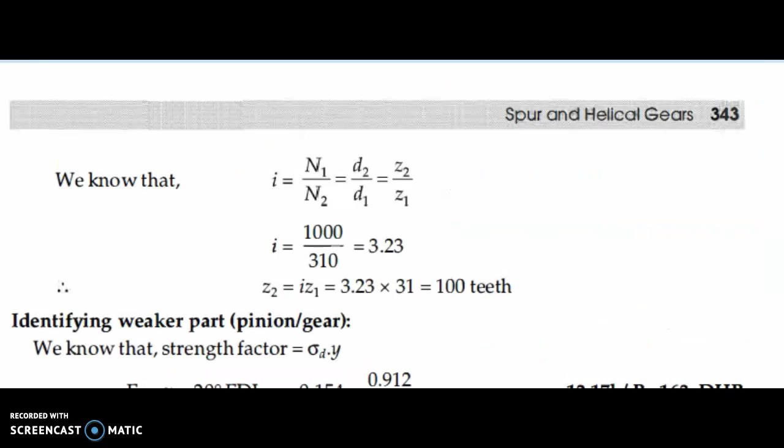There are a lot of changes from our previous questions. This is a particular case of design question, and from it we can identify the given data. The power P is equal to 20 kilowatt, and the service is 8 to 10 hours per day. We need a service factor for the calculations. For that value we need a particular category section for 8 to 10 hours per day, and it also shows medium shock, so there will be low shock, medium shock and heavy shock sections. Using the table we can find the service factor.

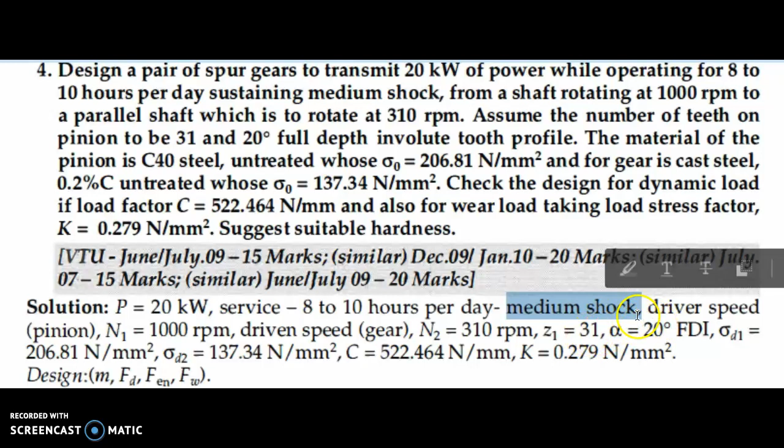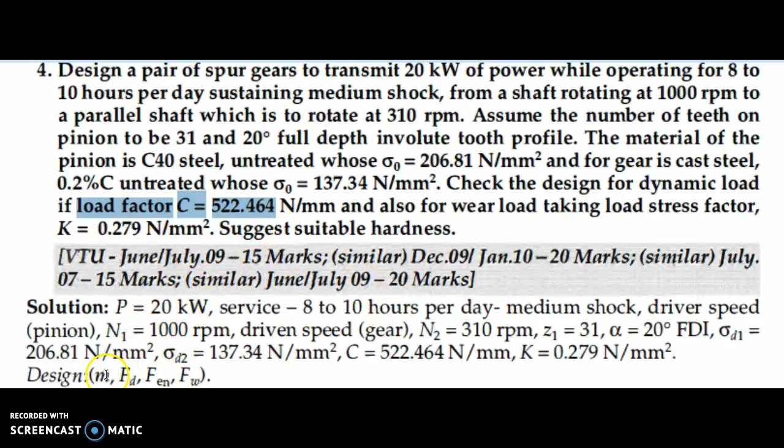They also give the speed of the driver as 1000 rpm, and speed of the gear as 310 rpm. Z1 stands for the number of teeth on pinion, that is 31, and alpha is given as 20-degree full depth involute system. Then sigma D1 is equal to 206.81 N/mm², and sigma D2 is equal to 137.34 N/mm². The value of C is given, that is another new thing - check the design for the load factor, C is equal to 522.464 N/mm, and the value of K, the load stress factor, is given as 0.279. You have to find the value of module, FD, FEN and FW.

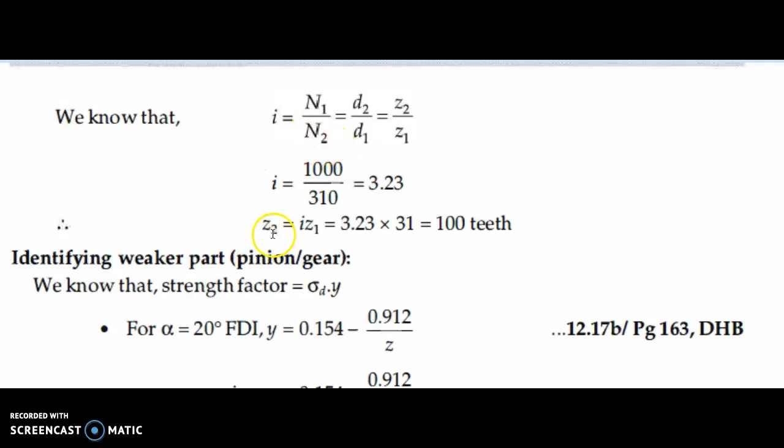Now we can go for the calculation. I is equal to N1 divided by N2, that is the speed ratio, and using this equation you can find the value of Z2, that is equal to 100 teeth. Then identify which one is weaker, pinion or gear.

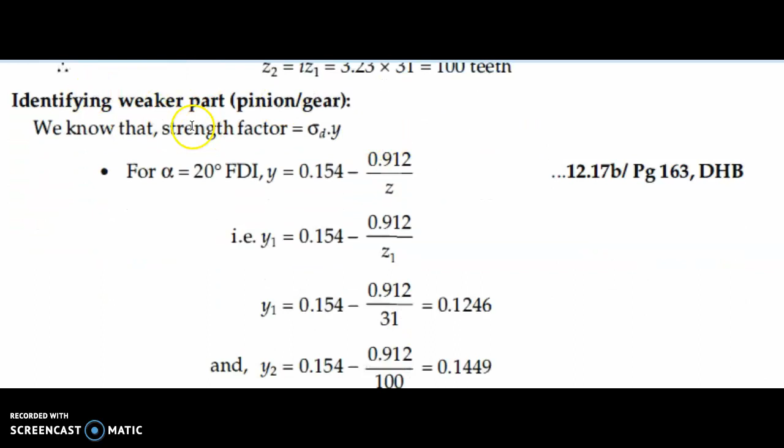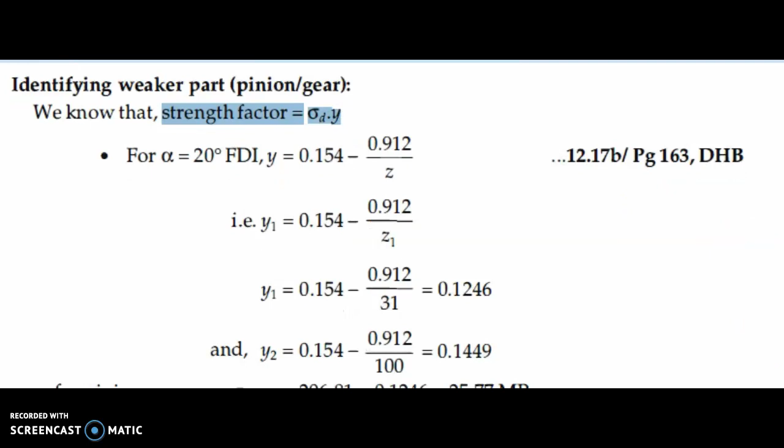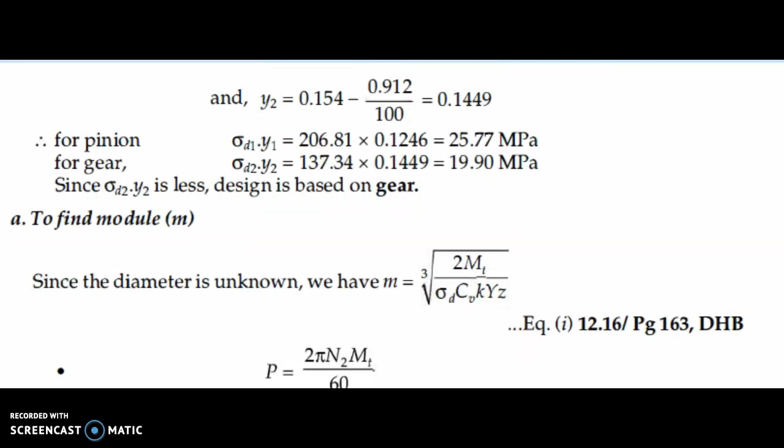Using the strength factor equation, strength factor is equal to sigma D into Y, you can find the strength factor for pinion and for the wheel. For the pinion the value is 25.77, and for the gear it is 19.90. So the lesser value is for gear, meaning we have to design based on gear only. From that conclusion we go for further calculations to find the module.

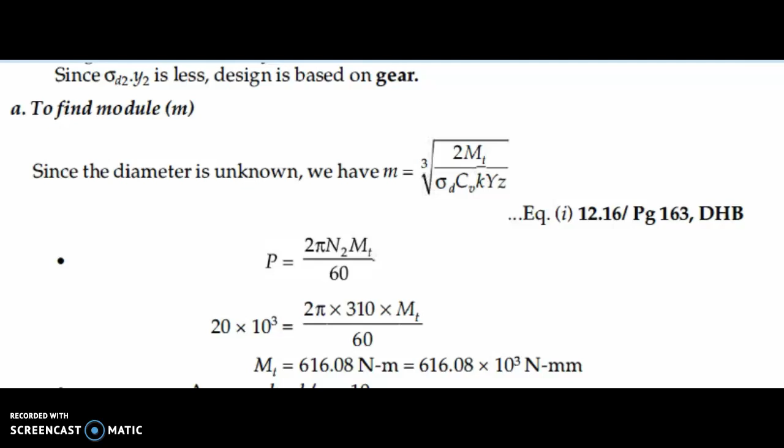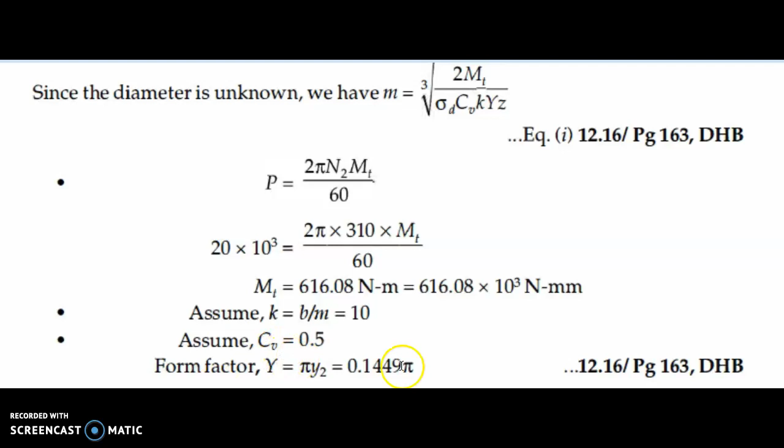Using this equation you can find the module. We already know these equations, so you can solve for the value of MT. The values of K and CV are assumed values - take these as 10 and 0.5 respectively. Then you can calculate the form factor using Y2. Finally we find the value of M, that is equal to 3.4 mm.

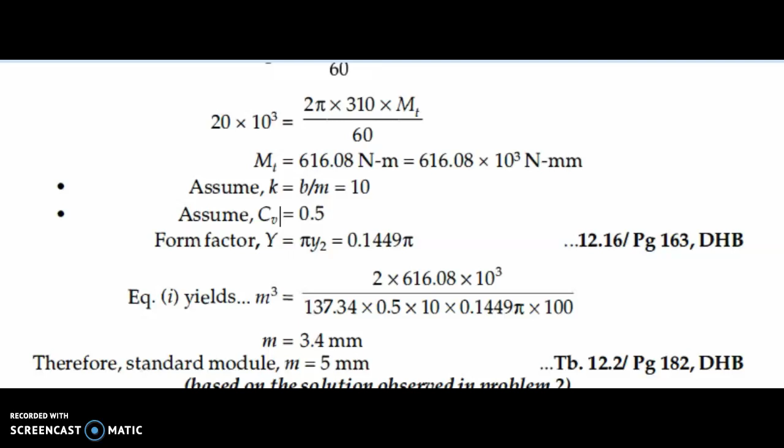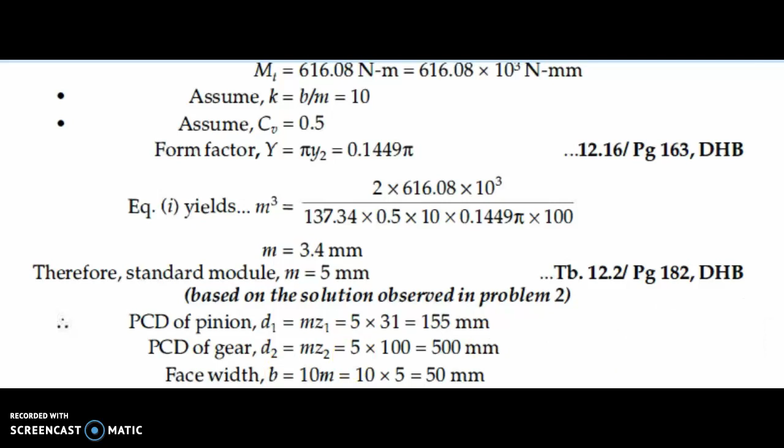Then standardize the module according to our data book. In table 12.2 there are standard modules shown, so using that table you take the value of M, here assumed to be 5. Once you have the module, using the general equation M is equal to d by Z, you can calculate the values of D1, D2 and B. B is assumed using the K by M ratio. From here we can identify these values.

The value of sigma D2 we already calculated, so we can find how much it will come. Using Ft is equal to pi into sigma D into Cv into B into Ym, and using this equation we find the value of V. We get 8.12, which is greater than 8 meter per second.

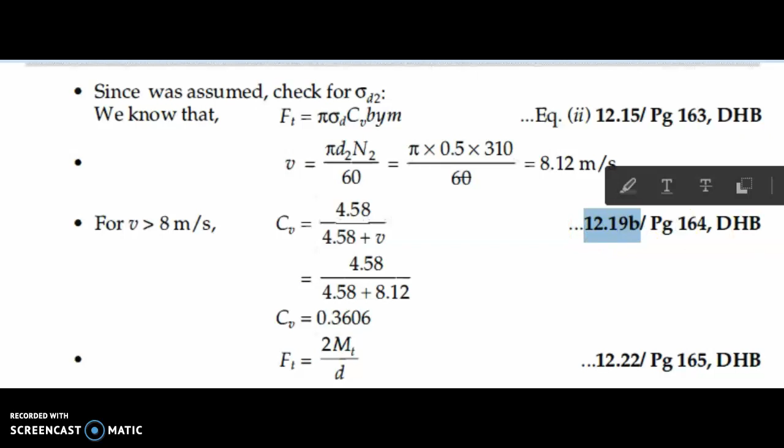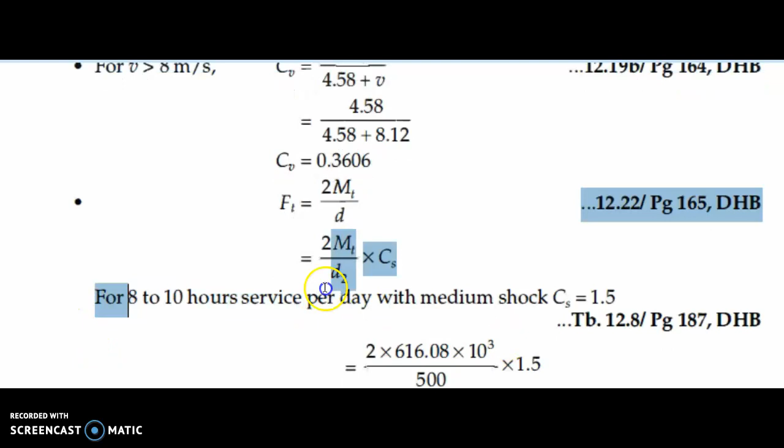So go for equation 4.58, that means equation number 12.19b, and take the value of Cv according to the value of V only. Using that equation you can find the value of Cv, and after that find the value of Ft, where Ft is equal to 2 mt divided by d. The question gives the service factor for 8 to 10 hours per day with medium shock, so using table 12.8 we take the value of Cs equal to 1.5.

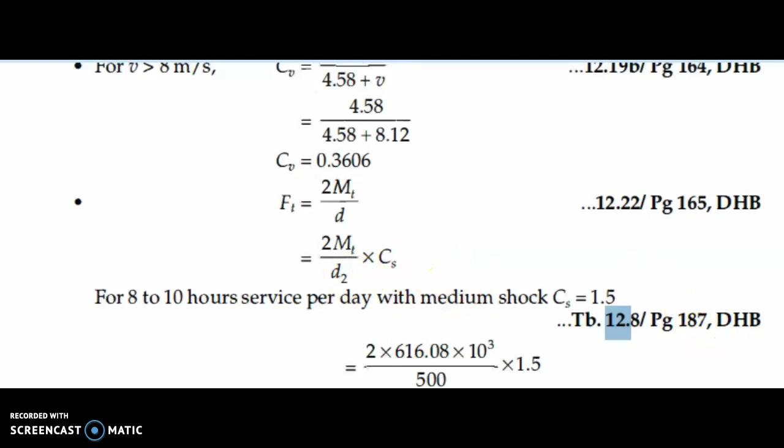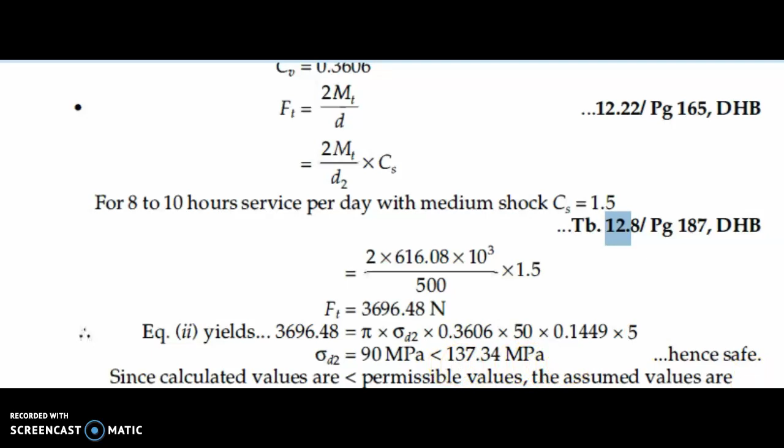Multiply that value with Cs, and that will be the final value for this question. Then we get Ft, and we compare the value of sigma D2. Using this equation, we get sigma D2 equal to 90 megapascal, which is less than the given value of 137.34 megapascal. So our design calculations till now are safe, and we can move to the further section.

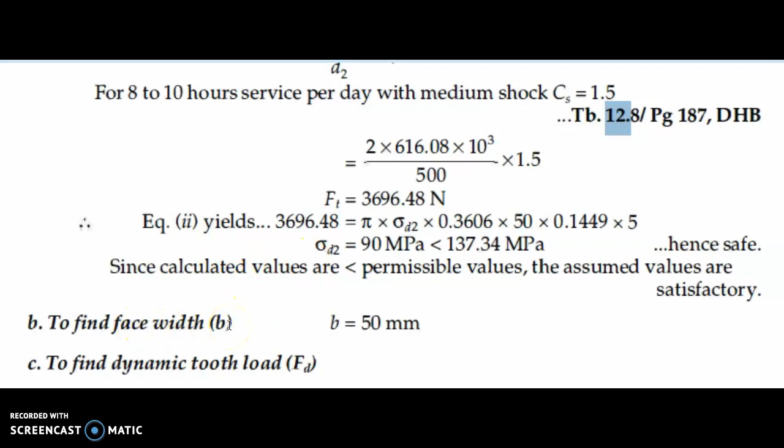Next, we can finalize the value of face width, that will be 50 mm. Then we can find the dynamic tooth load. Dynamic tooth load is given by an empirical equation — it's a big equation. Using this equation, you can find the value of Fd.

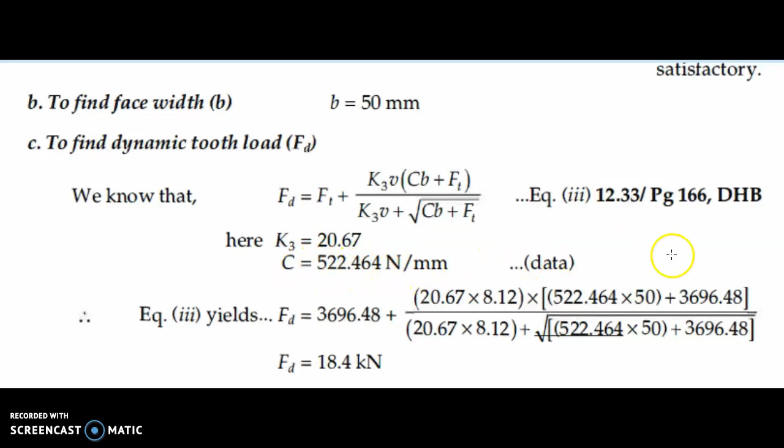For that, the value of K3 is given, and the value of C. C actually we can take from our data book, but in our question C is given, equal to 522.464 Newton per millimeter. So don't go for any assumed value or data book value, because it is already given in our question.

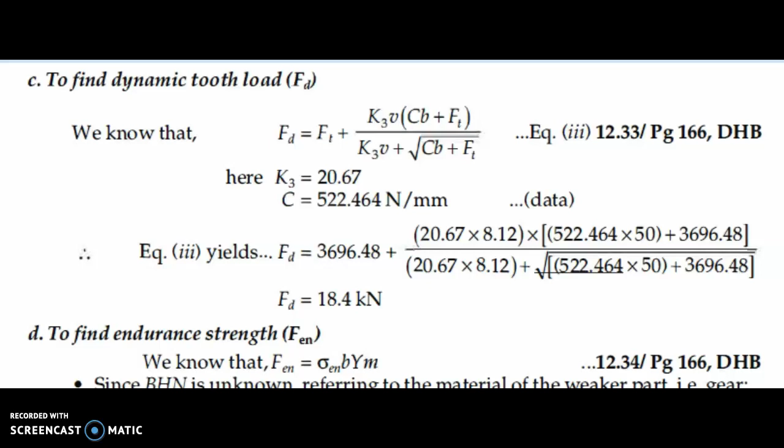Then the value of Fd can be found. Next we go for endurance strength, Fen. In equation 12.34, the endurance load is sigma En into B into Y into M. In our case the BHN, Brinell hardness number, is unknown. So referring to the material of the weaker part — since we are designing the gear only — the cast steel with 0.2% carbon untreated, we get BHN equal to 180.

From table 12.7, we take the value for 0.2% carbon untreated steel. The value of BHN is equal to 180. You get this value from this table itself. Using that table, you take BHN equal to 180.

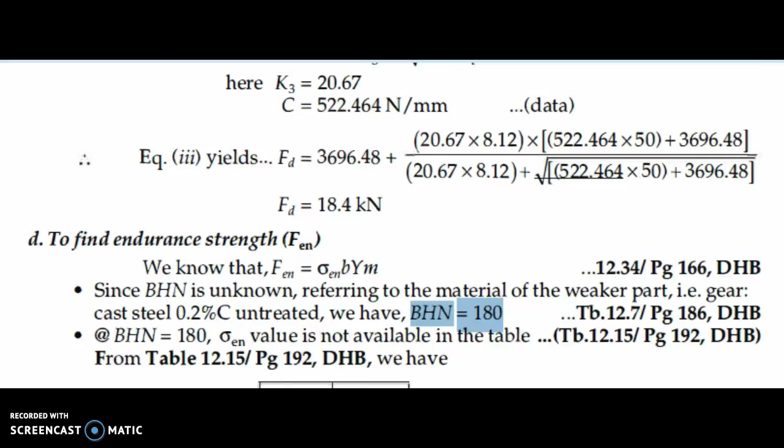Then we take the value of sigma En. That value is not directly available in our table, so from table 12.15 we take BHN value 150, for which sigma En is 259, and for 200 BHN the value of sigma En is 345.

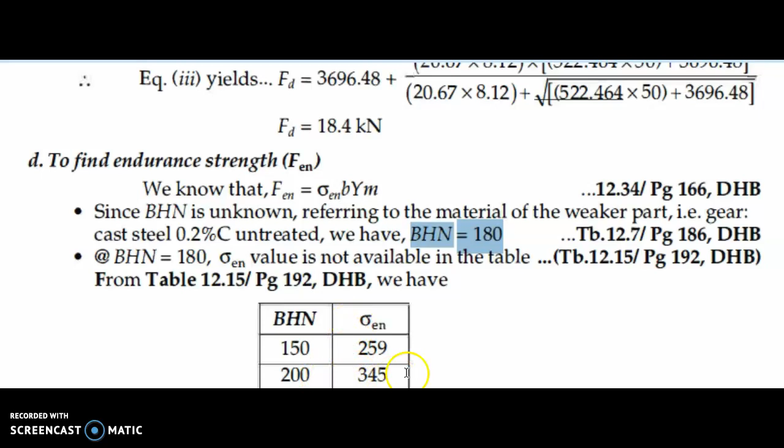So we take an average, median value using an equation: sigma En equals 345 minus 259, divided by 200 minus 150, which gives 1.72. Then sigma En equals 259 plus this value times the difference for our condition, which is for the 180 section — 180 minus 150. Using this equation, it becomes 310.6.

This is the median method we already studied in our mathematics section. So from a table, if there are no particular values listed, we can use this equation to find the correct value of sigma En. Then using that, you can find the value of Fen, which becomes 35.35 kilonewton.

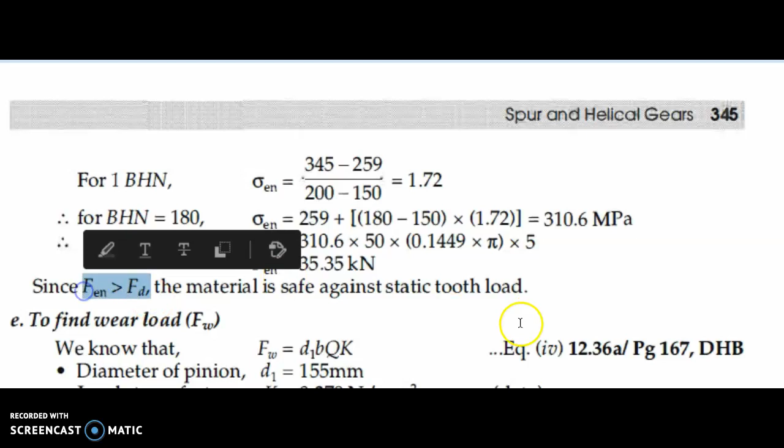Since Fen is greater than Fd, the material is safe. This condition must be satisfied, otherwise we cannot move to the next section. Here the design is again safe, so we can move to the further section.

Next we have to find the value of Fw, the wear load. From equation 12.36a we take Fw equal to D1 into B into Qk. D1 is a given value, and the next one is the load stress factor, the value of K, which is already given in our question.

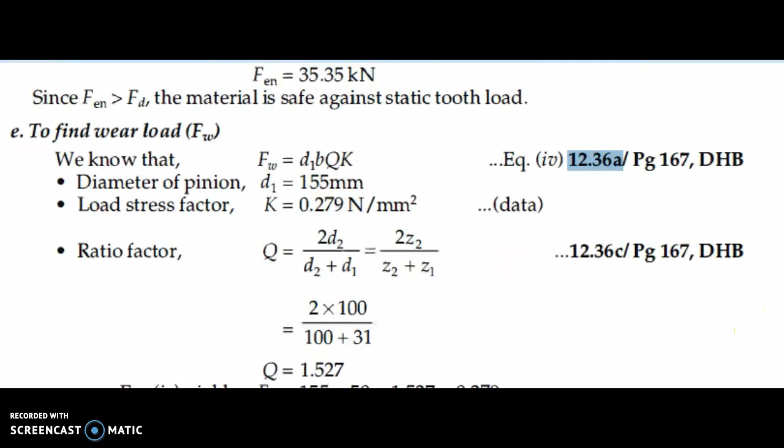Don't go for any further assumption or data book reference values, because these values are directly given in our question. Next, using the equation 2z2 divided by z2 plus z1, we can find the value of Q.

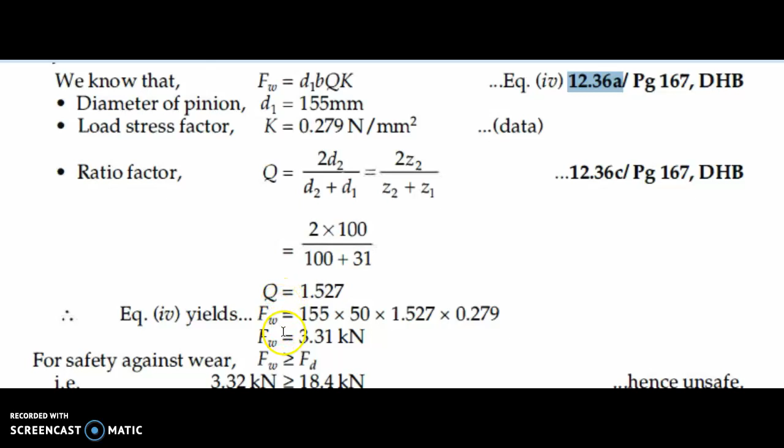Thus we get all the values needed to find FW, the wear load. So we find the value of FW equal to 3.31 kilonewton, which is also less than...

FW should be greater than or equal to FD. The pinion is subjected to... here it shows that it should be less than FW. Now in this case FW is less than FD, so the design is unsafe.

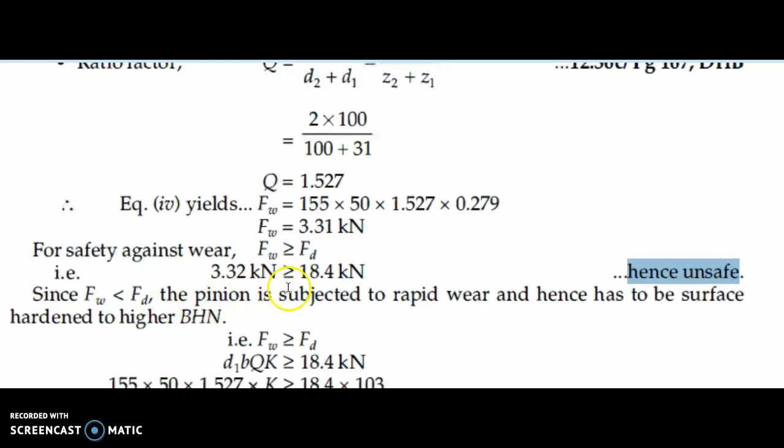Here it shows that the design is unsafe. So we can conclude that FW should be greater than FD for the pinion to be safe — but here FW is less than FD. So the pinion is subjected to rapid wear, and hence it has to be surface hardened to a higher BHN.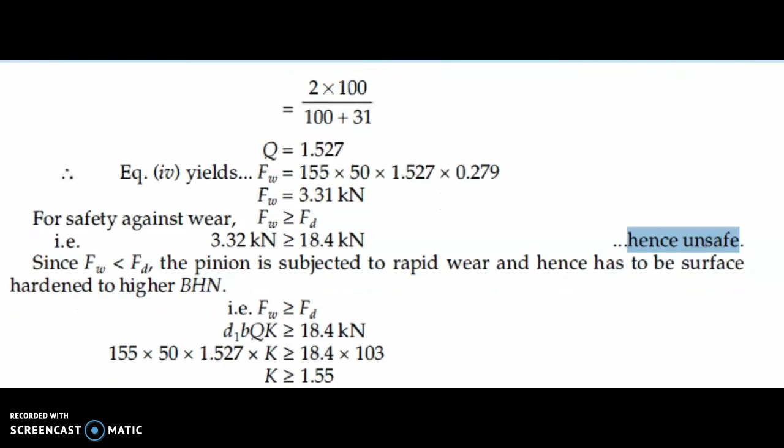So we go for the next level — we have to recycle, or redo the calculation one more time. How? FW should be greater than or equal to FD, that is D1·B·Q·K should be greater than or equal to FD, equal to 18.4 kilonewton. So take the value K equal to 1.55 from here.

Using this equation, for a steel combination, the value should be greater than 1.55. For that particular case, we have to take the value of BHN equal to 350, and for the gear it is equal to 300. Okay, thank you.